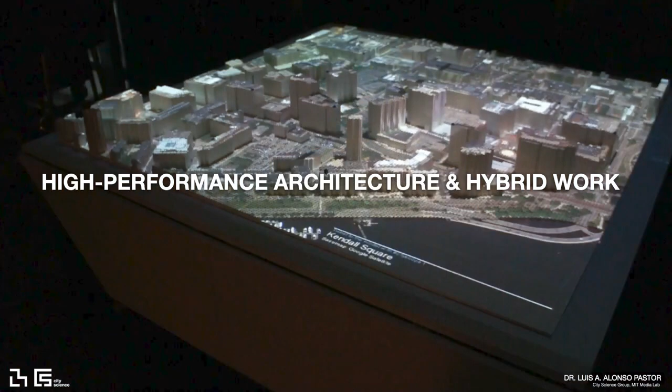I'm going to follow up with Kent. As Kent was explaining, after the decarbonization of the electric grid and after the electrification of the vehicle fleet, we will reduce the environmental impact of the people living and working in Kendall Square from 17.19 tons of CO2 to 15.50 tons of CO2.

From this, one third is related to buildings and construction process. When we talk about CO2 and buildings and construction, we have to make a difference. There is operational CO2, the CO2 we produce with lighting and air conditioning, and there is embodied CO2 in the materials of the building.

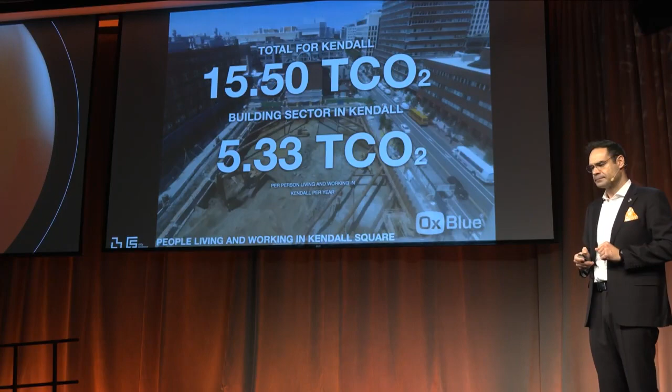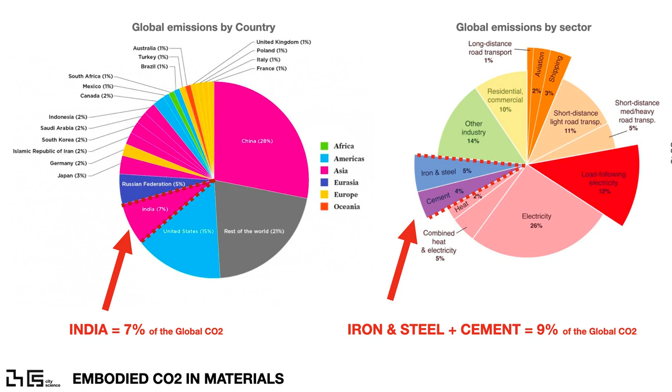So let's look a little bit at the materials. As an example, if we look into the sector of iron, steel, and cement, it produces 9% of the global CO2 of the planet. Just to give some context, the country India produces 7%. So what we are saying is that 1.38 billion people produce less CO2 than the steel, iron, and cement sector.

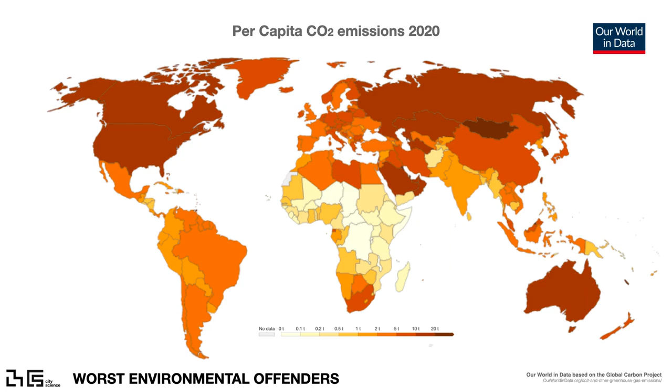Another thing, how are we calculating the CO2 per person? What we are doing is taking all the CO2 that each country is producing and dividing it by the people in the country. With that lens, countries like United States and China are the bigger offenders on the planet.

But let's look at this with a different lens. As Kent was explaining, what if we look into how goods and products are moving in the world? If we look with that lens, we will see that a lot of the CO2 that China is producing is being exported to other countries in the form of vehicles, telephones, computers, materials, and the final life of these products happens in a different country. So we have to attach that CO2 to that country. With that lens, countries like China become almost negative CO2 producers.

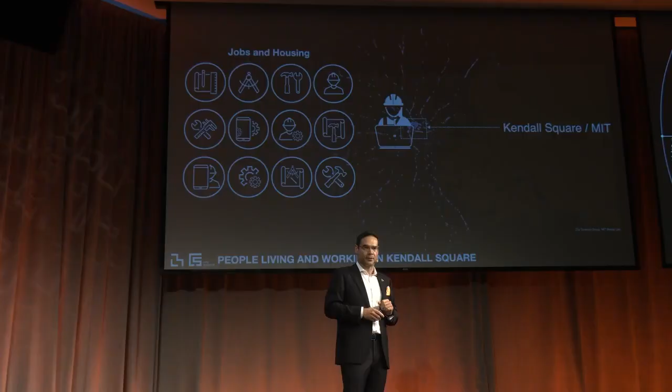Food for thought. That is the reason why we are starting to do this research, trying to understand the environmental impact of people living and working in Kendall Square? We are using the lens of the consumer carbon footprint, a little bit of what Kent was explaining before. Each of our actions has CO2 attached to it, operational and embodied. So, a little bit of awareness.

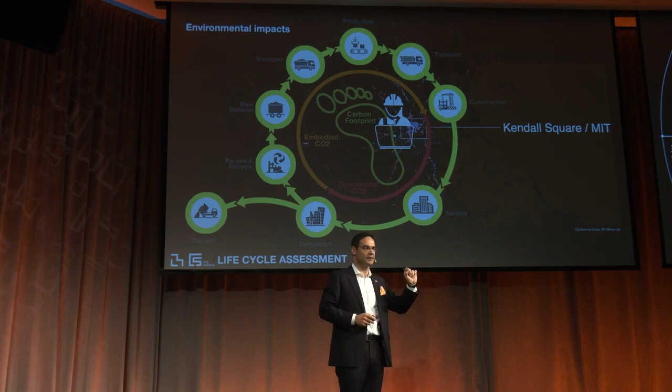Each of us has a different carbon footprint. In order to have that bubble, that indicator, we are using life cycle assessment methodologies to unify all this carbon footprint into one indicator. But yes, each of us has a different carbon footprint depending on where we live, how we move, or even what we eat.

The team, we are going to go through that. But let me keep focused on buildings, mostly on existing buildings. Let's talk about the operational CO2.

Usually we say that a building has 75 years of lifespan, and from that, what we are doing is taking all the energy that we are producing during that life and making the calculation into CO2. That's what we call operational CO2. So how can we reduce this operational CO2?

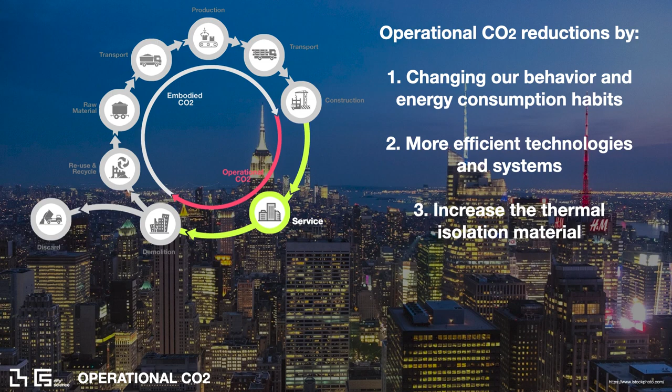There are three ways. One is changing our behavior. The second is more efficient technologies, which is what we usually call building retrofitting. The third is increasing the thermal isolation, that's deep building retrofitting. Let's start with the first one.

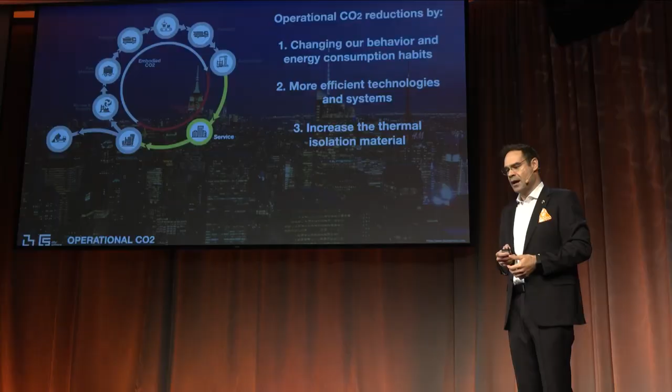Let's use hybrid work as a good example of how we are changing our behavior. People are saying that hybrid work will reshape the cities, offices are going to be empty, the city is going to be empty, like this movie, everything is going to be empty. I don't think so.

Telework has been here since the 80s, and we are learning a lot from teleworking, from working from home. What we are learning is that people working from home are usually a little bit more efficient than people working at the office. But the problem is these people are less likely to grow in the company. Why? One of the reasons is the lack of trust.

Yeah, we are still being animals. I'm so sorry, humans, we are a little bit animals. And we build trust with this thing that is happening here: face-to-face communication.

So that's one of the reasons why, at least in the United States, it looks like we are coming back to normal after the pandemic. We have numbers very similar to 2019, when we used to work from home between 1 and 3 days per week. Okay, let's take that number, 3 days per week.

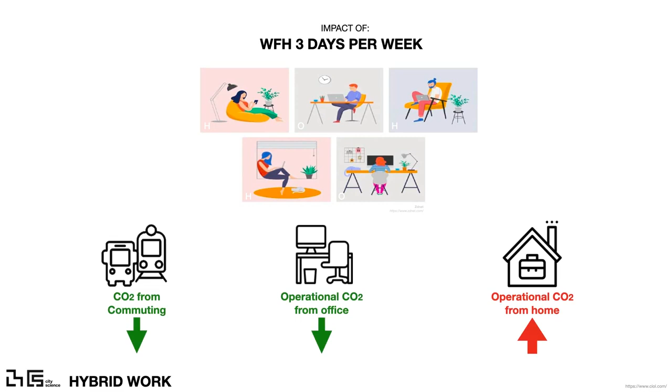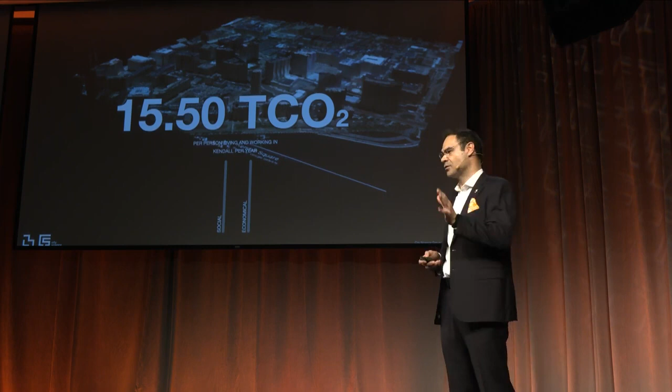Let's imagine this policy in Kendall Square, where everybody living and working in Kendall spends 3 days working from home. That will reduce the CO2 from commuting, reduce the operational CO2 at the office, but increase the operational CO2 at home. The final balance is that we can reduce 0.05 tons of CO2 per person living and working in Kendall Square per year, and we are not going to have a significant socioeconomical impact.

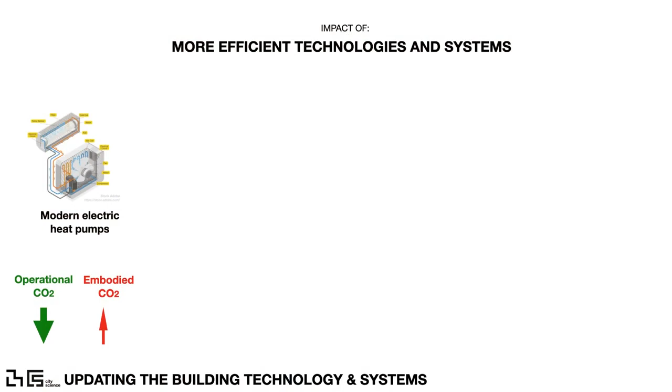So let's go to the second kind of measure. What about more efficient technologies? What if we have more efficient electric heat pumps, more efficient ventilation and air conditioning, more efficient lighting? And of course we will need a super smart building to control all these new super efficient things, because I cannot control all that by myself.

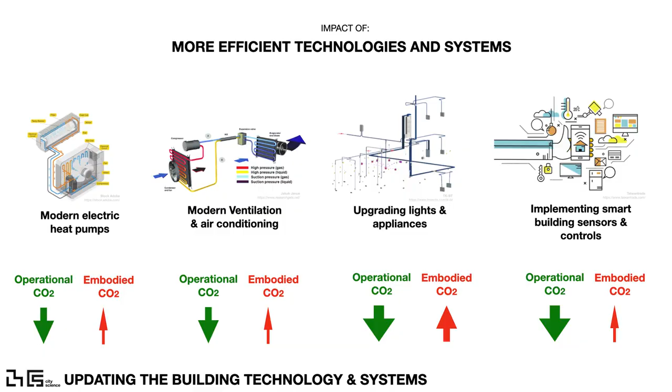What we are going to do here is reduce the operational CO2, but we are going to increase the embodied CO2 because we are bringing more stuff into the building. The final balance is that we can reduce up to 0.40 tons of CO2 per person per year in Kendall Square, and we will have a small socioeconomical impact because we are bringing some specialized jobs into the community.

That's good. Let's move into the third option: deep building retrofitting. What if we increase the thermal isolation of our buildings? What if we improve the exterior cladding? And what if we improve the air tightness?

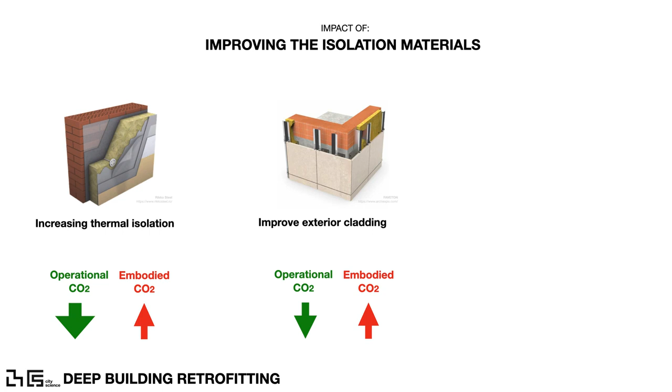Same thing—for sure we will reduce the operational CO2, but we are bringing more materials into the building, so we are increasing the embodied CO2. The final balance is we can reduce up to 0.65 tons of CO2 for each person living and working in Kendall Square per year. And we are going to have a significant impact on the socioeconomical indicators because we are bringing jobs into the construction sector.

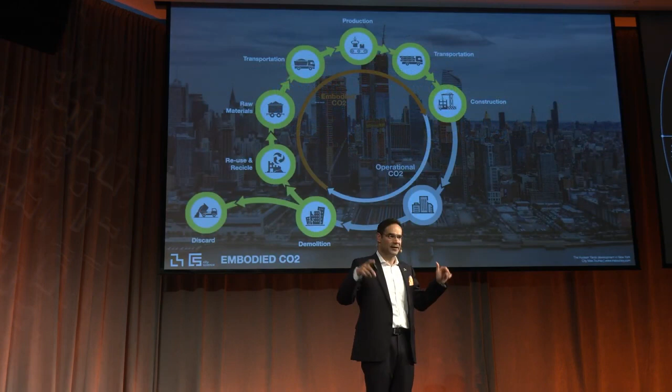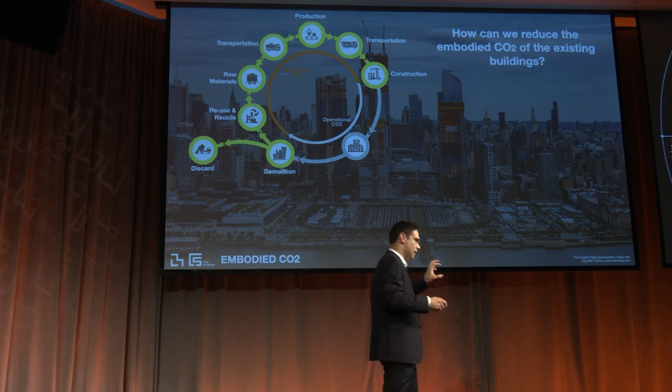Okay, now here's the challenge: how can we reduce the embodied CO2 of existing buildings? That's kind of a heck of a question. Think about this—every time we extract a material from nature, we send it to the factory and build the construction material, then send it to the construction site and build the building.

That material spends 75 years in a building, and then we discard or reuse it. All that process has a lot of embodied CO2, and what we do is divide all that CO2 over the 75 years of the building. So if that CO2 is already embedded there, how can we reduce it?

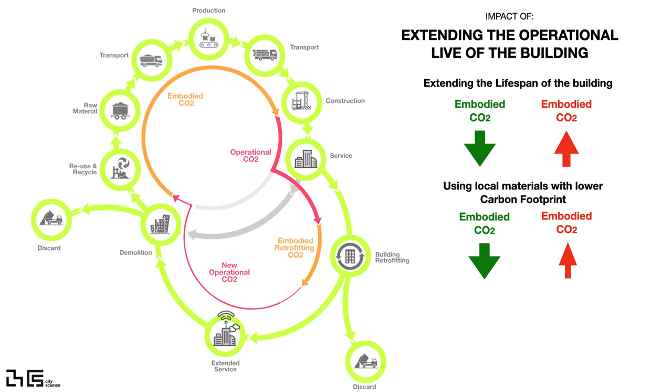There is not a very good solution, but there is one: expanding the life of the building. Instead of removing the building, we could reuse part of it. Usually we can reuse between 40 and 60% of the building and expand its life. Of course, we are going to bring new materials to the building, so those materials should be sustainable and probably locally produced. And maybe we can also explore other options like carbon sequestration materials.

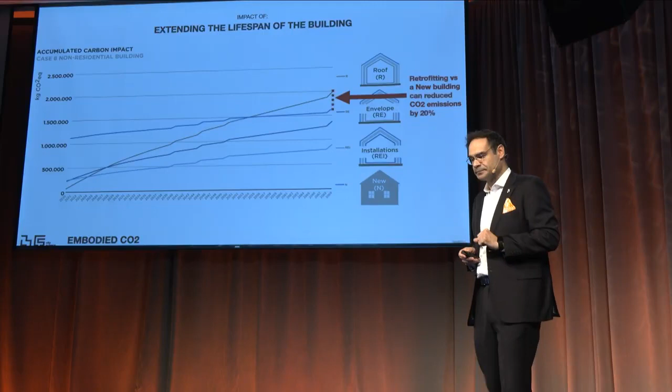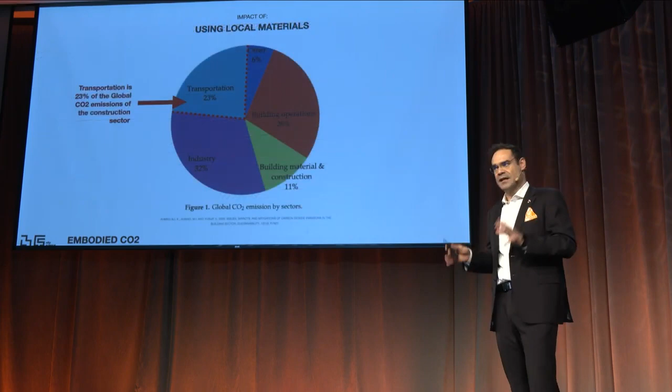Let's look a little bit quickly into this. Expanding the life of a building—some research says we can eliminate up to 20% of the environmental impacts of the building. Also, just by using local materials, we can reduce up to 23% of the embodied CO2 that is in the material due to transportation.

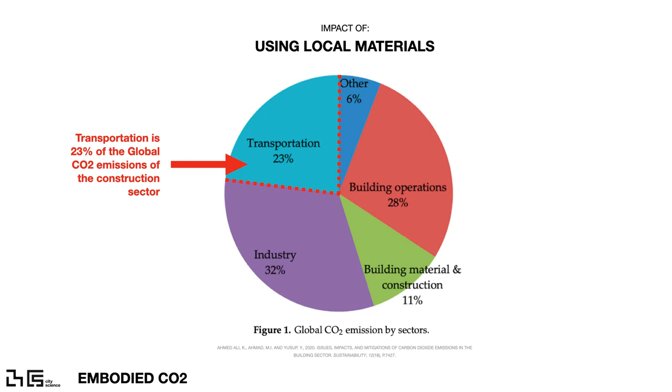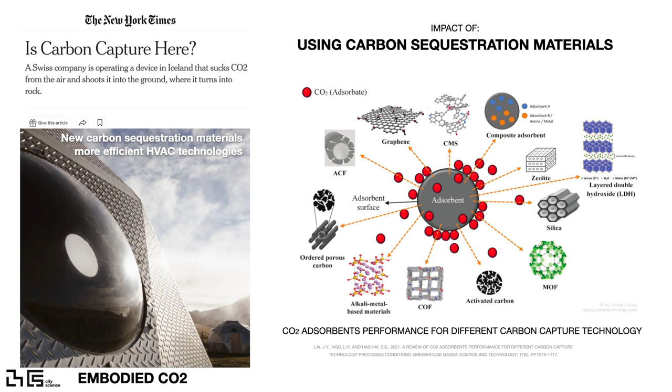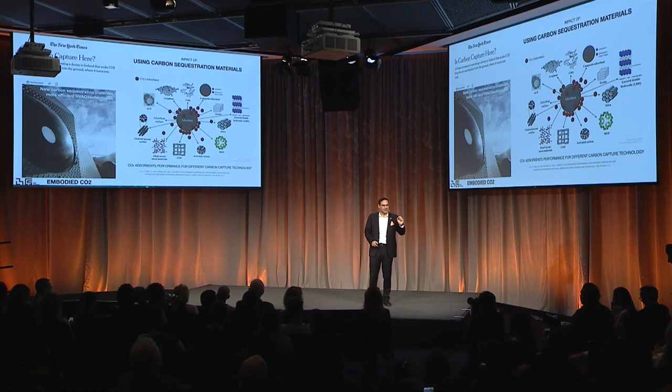And what about carbon sequestration? Well, carbon sequestration materials are not new, but they are kind of new for construction. And to be honest, I have no data—I don't know the life cycle of these. So probably you're saying, well, why is Luis talking about this if he has no data? Yeah, true, but it's a good entry point, because I think materials, instead of being part of the problem, maybe they can start being part of the solution.

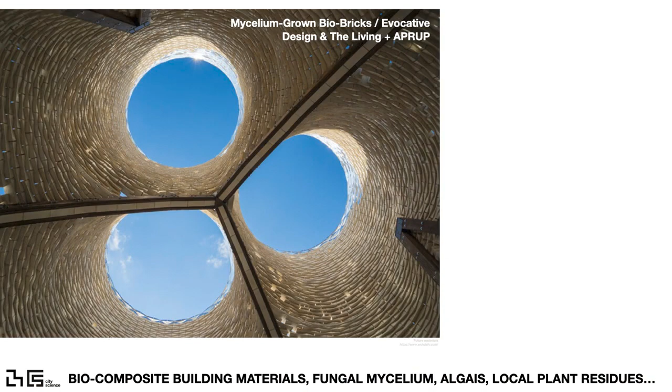So what if, instead of talking about steel, iron, and cement, we start talking about biocomposite building materials, fungal mycelium, algae—materials that can capture CO2 but maybe also produce oxygen? What if we could plant a seed and grow a house? What if we could live inside of a live house?

Okay, we are at MIT, and maybe I am going too far, but I just wanted to throw out the concept. Let's see what happens. Let's go back and wrap up.

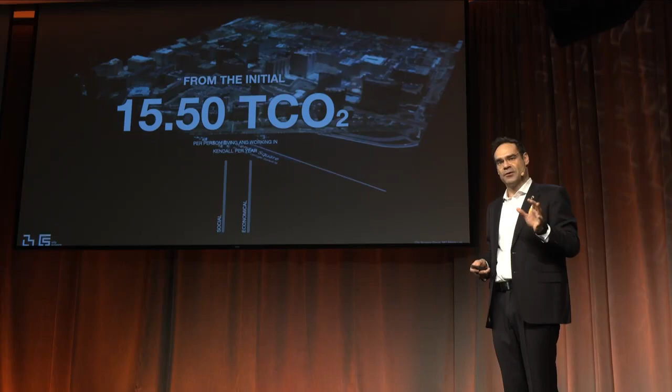Okay, if we just take the hybrid work, building retrofitting, and deep building retrofitting and put it together, we can reduce up to 1.20 tons of CO2 per person living and working in Kendall Square per year.